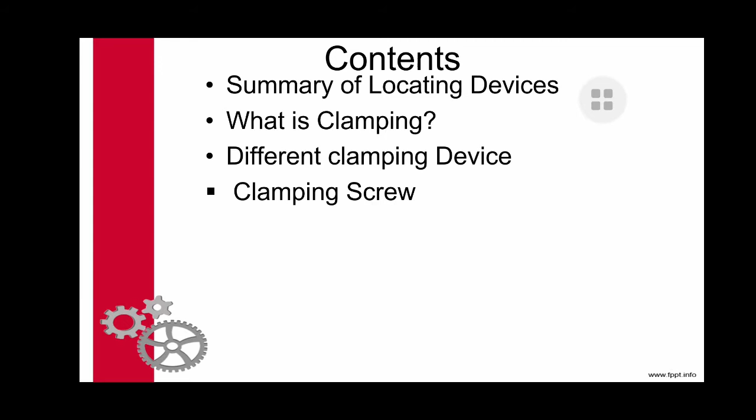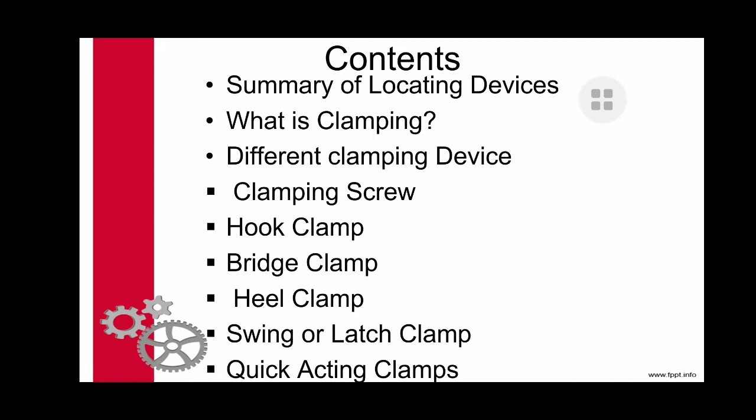Now coming to the content, we'll see what are the summary of the previous lectures, that is of locating devices. What is clamping? Different clamping devices such as clamping screw, hook clamp, bridge clamp, heel clamp, swing or latch clamp, and last is quick acting clamps. One by one we'll be seeing all these types of clamps.

Before starting to these types of locating devices, these devices are mainly further classified into two types of bodies. That is, one is the main part, and another is the body. The main part is that which locates the workpiece, while the body is fixed into the jig or a fixture plate, or you can simply call it a work table.

First type is cylindrical locators. This type of locator, as the name itself suggests, is cylindrical in shape. This type of locator is mostly used where the hole size is accurate, or there are no variations in the hole size, or wherever there are previously drilled holes available for locating the workpieces.

Conical locators are used where there are variations in the hole size, so that they can be accommodated by the slanting side of the conical locator.

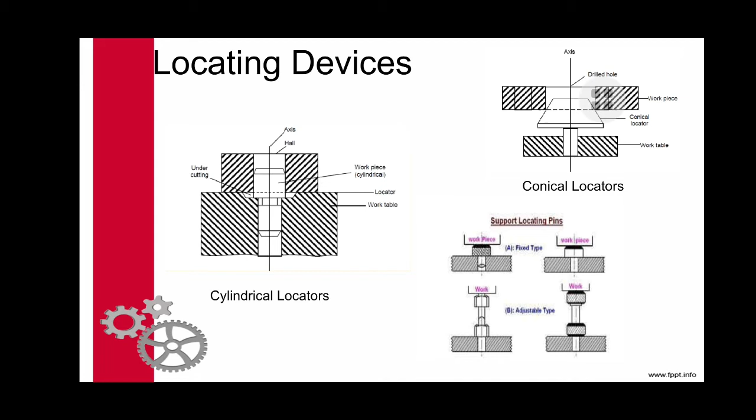Supporting locating pins are those types of locating devices where they only support the workpiece against the operation or work table. They can be again conical type or flathead type. Flathead type are mostly used where there is a machined surface available, and conical type is used where there is casting or other surfaces available for supporting.

Next are screw jack pins, V locators, diamond pin locators. Screw jack pins are again used to press the pin at a certain distance, that is to maintain a distance between the workpiece and the machining table, and these pins are locked with the help of locking screws.

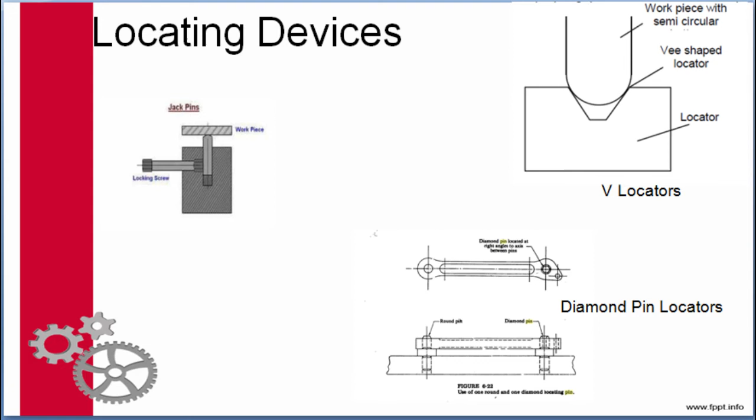Next is V locators. Whenever there is a workpiece with semicircular or circular surface, you can use a V-shaped locator.

Now, what are diamond pins or diamond pin locators? Whenever there is a variation in the different sizes of the same workpiece with two different holes, and the distance between the two different holes varies, you can use a diamond pin locator.

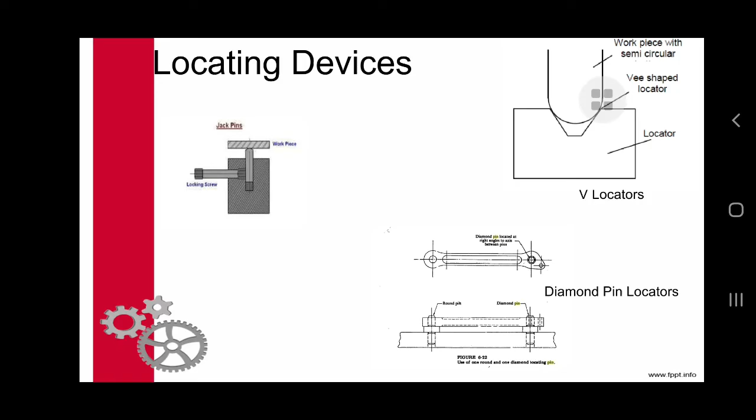Coming to the next, what is clamping? As you have studied in the 3-2-1 principle, it is necessary to restrict the degrees of freedom for ease of machining operations. So whenever you locate the workpiece with the help of locating devices, sometimes it is not possible to restrict the degrees of freedom of the workpiece in all directions, that is in translatory X, translatory Y, translatory Z, and rotational motion.

Similarly in the opposite direction, that is 12 degrees of freedom, it is not easily possible to restrict by simply using locating devices. So here you are required to have clamping devices, that is you can simply clamp the workpiece against the table so that the workpiece is located easily and held against the work table easily, so that the machining operation is carried out without any change in the location of the workpiece.

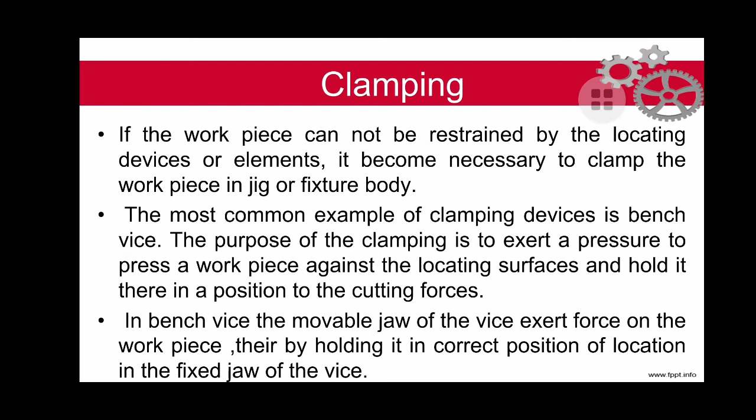Now what are different clamping devices? Clamping screws, hook clamp, bridge clamp, heel clamp, swing clamp and quick acting clamp. So one by one we will be seeing what these clamping devices are.

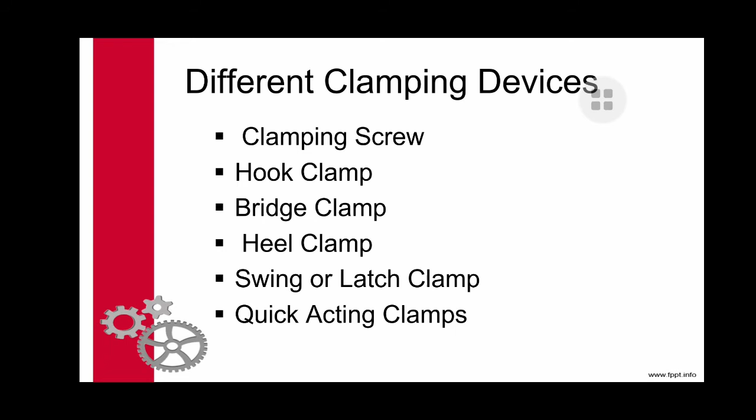So what is a clamping screw? A clamping screw is nothing but a simple screw which helps to exert a clamping pressure onto the workpiece. Consider a simple flat plate workpiece which is to be located on a work table and which is to be machined, drilled, or any other operation is to be carried out.

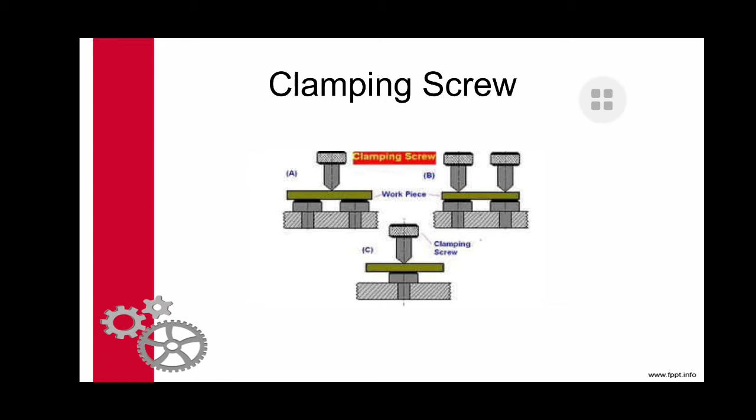This plate is located with the help of locating or support pins against the work table, and then a clamping screw is held above it and tightened with the help of the threaded portion so that the clamping pressure is applied onto the workpiece and it is held against the machining table so that the degrees of freedom are restricted and you can machine easily. This type of clamping device can be used wherever only a light amount of clamping force is required, that is for sheet metal and other workpieces with very less thickness.

Coming to the next, that is a hook bolt clamp. It consists of a hook type structure which is attached to the machine table with the help of a hook bolt, where one end is attached to one side of the machining table and the other end is kept free so that one can carry out the machining operations on the other end.

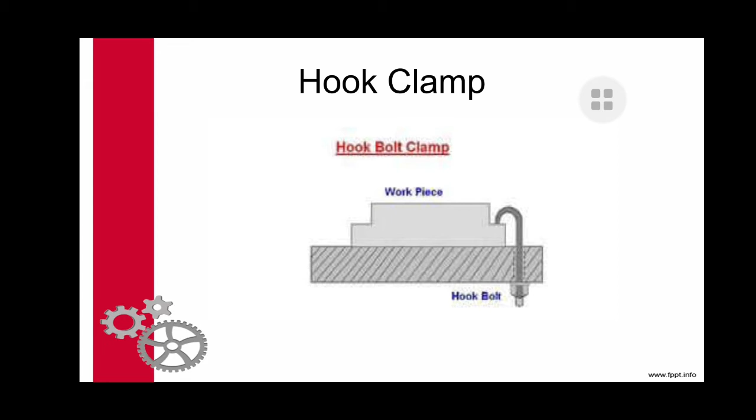Before loading the workpiece, one can loosen the hook bolt, insert the workpiece, properly place the hook above the workpiece, then tighten the hook bolt so that the degrees of freedom are restricted and proper clamping force is applied onto the workpiece. Whenever the machining operation is over, one can loosen the hook bolt, remove the hook, and then the workpiece is unloaded. This is a type of hook type clamp.

Next is a bridge type clamp. It is a very simple and reliable type of clamp among all the clamps. Here the clamping force is exerted by a spring and a clamping nut which acts upon a lever. A simple clamping nut is kept at the center, below that there is a spring, and in between the spring and the clamping nut there is a lever. One side of the lever holds the workpiece against the machining table and the other end of the bridge clamp is fixed.

Before loading the workpiece, the nut is loosened so that the lever does not act any pressure. The workpiece is now inserted sideways. Now the clamping nut is tightened and this helps the spring to compress, and thus the lever acts against the workpiece and the clamping force is acted upon the workpiece.

Now here the machining operations are carried out. After machining operations are carried out, one has to unload the workpiece. For unloading the workpiece, you have to loosen the clamping nut, rotating it anti-clockwise, so that the compressed spring returns to its original position, pushing the lever upward, and thus the distance between the lever and the machining table increases so that the clamping force is gradually decreased and one can remove the workpiece.

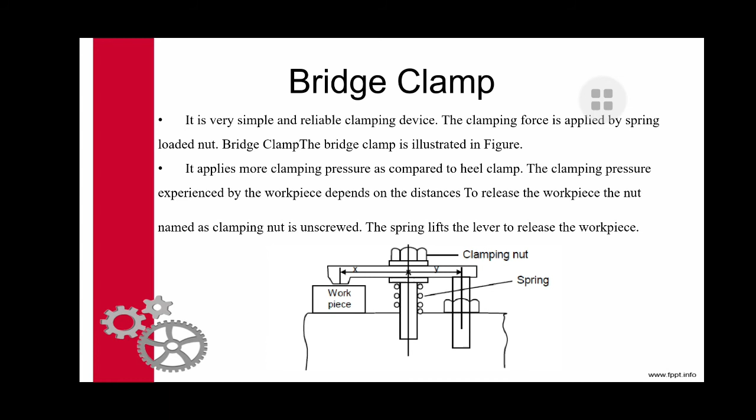Next is the heel clamp. Here another type of clamping device is seen. A heel clamp is same as a bridge clamp, but the difference is that a heel clamp can move sideways, that is it consists of a heel at the rightmost bottom. There is a similar structure - a lever, a clamping nut, and a spring.

In case of a bridge clamp, you have to loosen the nut so that the workpiece is unloaded from the machining table. Here, you have to first loosen the nut, insert the workpiece, then move the lever sideways along the heel so that the lever comes over the workpiece, and then tighten the clamping nut so that the lever exerts the required clamping pressure against the workpiece so that the degrees of freedom of the workpiece are restricted.

This clamping force exerted by the lever is stored by the spring and it gets compressed. Whenever you have to unload the job, you have to loosen the nut so that the compressed spring again tends to expand and pushes the lever towards the upper side, thus releasing the clamping pressure and the workpiece is free to unload from here.

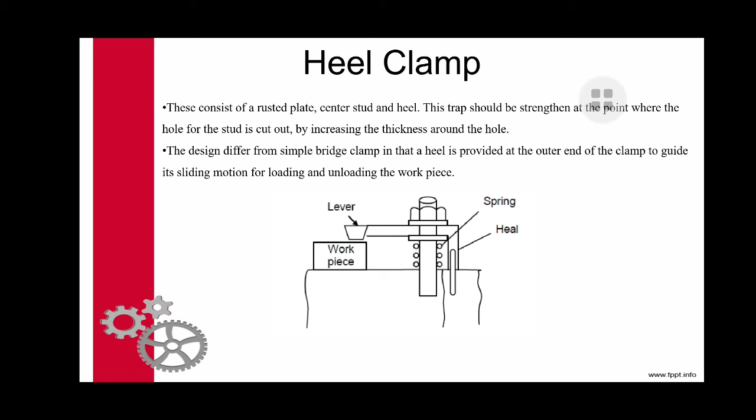But now you cannot easily unload the workpiece. Now what you have to do is push the lever and the heel backwards, and then remove the workpiece so that there is a gliding or sliding motion possible for the lever. So the difference between bridge type and heel type of clamp is: in heel type you can guide the complete lever to another position by simply gliding over the machining table, but in bridge type you cannot glide because there is no heel present.

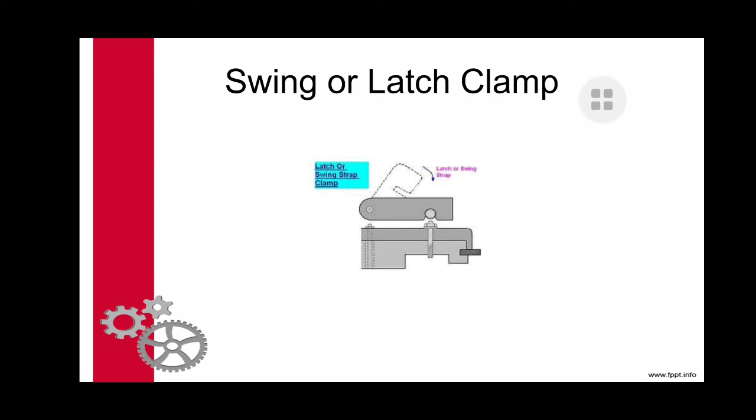Coming to the next, swing or latch clamp. Here, one end is fixed. There is a C type latch which is fixed at one end and which can move 90 degrees. When the latch is moved backwards, the job is loaded, and then with the help of a tightening screw one can tighten it so that the latch exerts the clamping pressure against the workpiece. So as the latch is moved backwards, one can load or unload the workpiece. After loading, to exert clamping pressure, the latch is moved further and tightened so that it exerts the clamping force necessary for restricting the degrees of freedom. Since the nut is fixed and the latch can swing from one position to another, this type of clamp is called a swinging clamp, or a latch type clamp.

Coming to the next, quick acting clamp. Previously, all the clamping devices we saw require a large amount of time and increase the cycle time for production. Now, with technology increasing, it is necessary to reduce the cycle time, that is, to increase the production rate. So clamping, declamping, locating and other idle operations do not increase real productivity, but decreasing their count helps in increasing the cycle rate. So quick acting clamps are devices that take very less time. These clamps exert very less clamping pressure, but they are used so that the clamping operation can be done within a less amount of time.

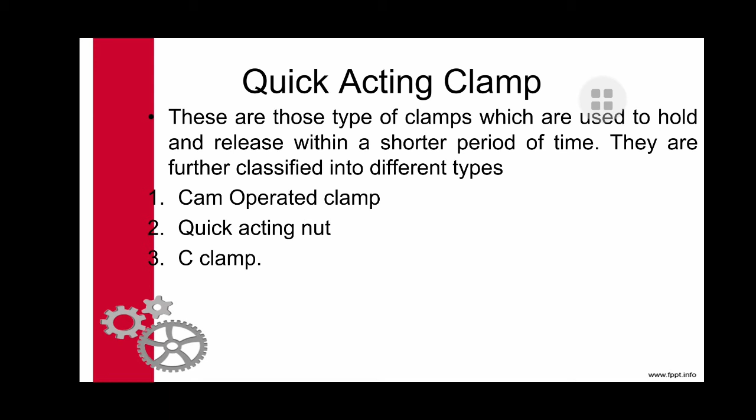They are further divided into three types: cam operated clamp, quick acting nut, and C clamp.

Coming to the next, cam operated clamp. It is one of the most simple and easily understandable mechanisms. The cam operated clamp consists of a lever which is bolted at the center against a spring. Students should look at the figure on the left hand side. Initially the lever is bolted at the center. Below the lever plate, a spring is kept at the bottom. To the right hand side, a lever operated cam or handle operated cam is placed. To the left hand side, the workpiece is placed between the lever and the machining table.

So whenever you push the handle below, it pivots the lever so that the right hand side portion near the bolt moves downward and the left hand side of the lever moves upward. This will cause the workpiece to unload easily.

Now, for the next cycle, you have to place the workpiece. What you have to do is pull the lever to the upper side, so that while the right hand side of the lever goes up, the left hand side of the lever goes to the bottom, and it tightens or adjusts the clamping pressure.

Now many students are confused about what makes the lever push backward when you release the handle, so that the clamping pressure is released. The spring present below the nut helps release the clamping pressure. Once again, whenever you push the handle below, it makes the right hand side of the lever push below, and the left hand side of the lever move upward, so that the workpiece can be removed easily.

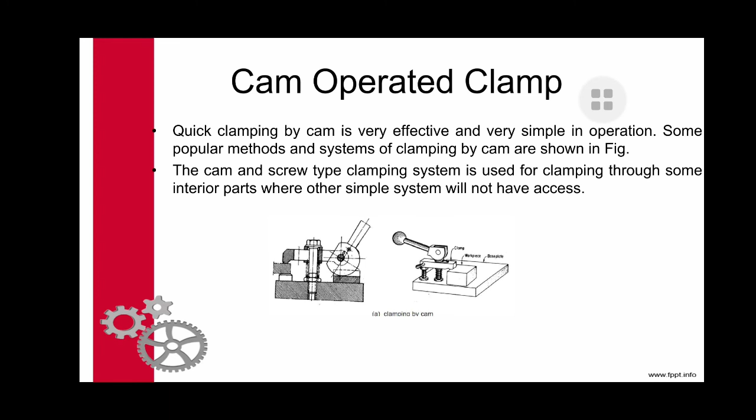Now, after placing the workpiece, to exert the clamping pressure, you have to pull the handle upside, so that the left hand side of the lever plate is pushed against the workpiece. This is how the cam operated clamp easily operates.

Coming to the next, this is the most important and most reliable clamping or quick acting clamping device, that is a quick acting nut. Initially one can look at the right hand side figure. The quick acting nut consists of two diameters: the diameter with flat face is called DN, and the diameter with threaded face is called DS. Here always remember DN is greater than DS.

Now whenever you are inserting this quick acting nut, first you have to insert it by facing the flat face of the nut against the face of the screw, so that the screw diameter DS is the same as the diameter of the quick acting nut's threaded portion.

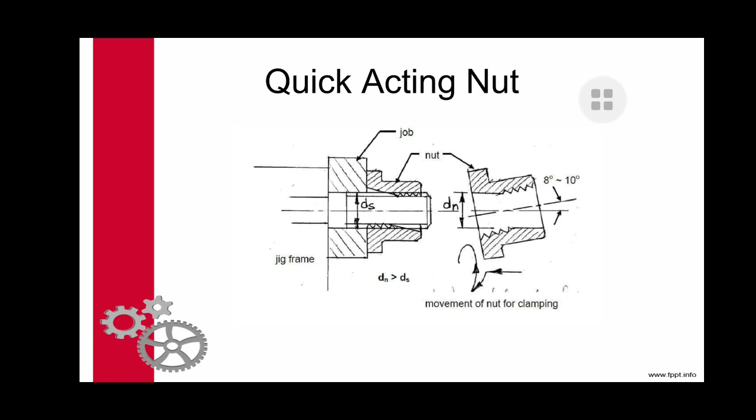Most students are still in doubt about which face is to be locked. So coming to the next figure, as you can see in the first figure at the bottom left, the flat face is inserted first, the nut is then rotated perpendicular, and this helps the screwed portion of the nut to lock with the screw, so that clamping pressure is located. Again, initially from the straight hole the nut is fitted, then rotated perpendicular, and then the screwed or threaded portion exerts the clamping pressure, as seen in the figure below.

Now why are this type of quick acting nuts used? They are used because whenever the screw portion or threaded portion of the screw is larger, it takes more time for a nut to pass over, increasing the cycle time. So such quick acting nuts are used for this purpose. For easier understanding, on YouTube anyone can search quick acting nut demonstration or animation of quick acting nut, and you will clearly understand how a quick acting nut performs its function.

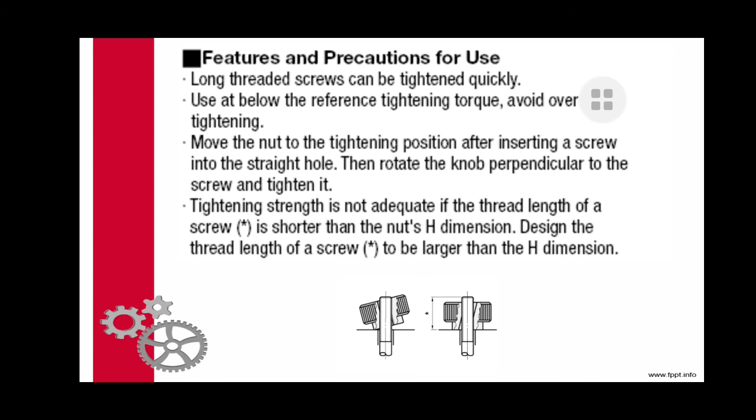So for loading this, one has to swing the C clamp back to the workpiece and then tighten the screw so that the C clamp exerts proper clamping pressure, and thus the machining operation can be done by restricting the degrees of freedom. Now for unloading the workpiece, you have to loosen the nut, remove the workpiece from the C clamp, and then you can unload it.

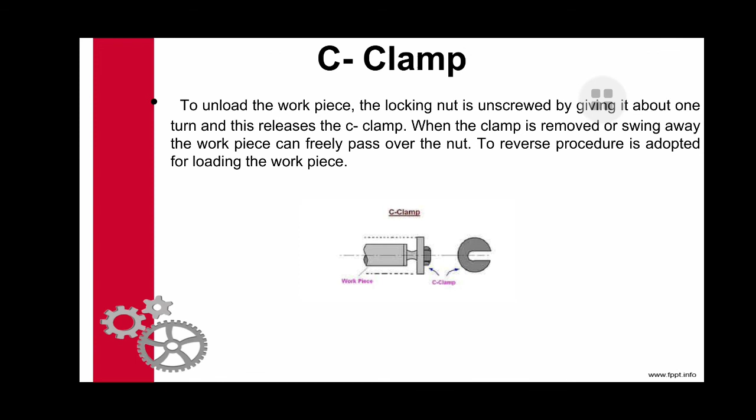So these are the different types of quick acting devices or quick acting clamps that we have seen. In the next lecture we will be seeing ejecting devices and then what is meant by foolproofing. Thank you.